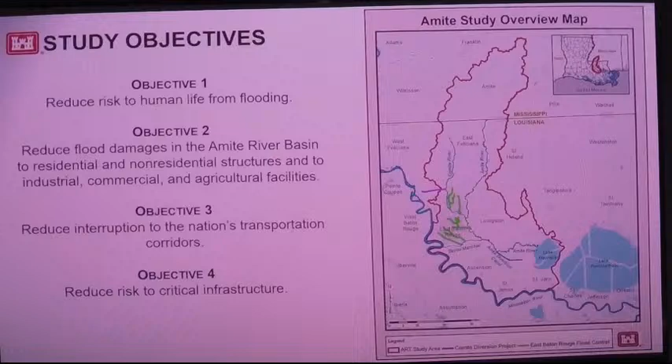The second objective is to reduce the flood damages to residential and non-residential structures, as well as businesses, industrial, commercial, and agricultural facilities. And then the third and fourth objectives aim to reduce interruption to critical infrastructure, which includes evacuation routes.

And it is important to note the coordination in our feasibility study because it is through early and continued coordination with the public stakeholders and other agencies that we develop alternatives and conduct that planning process. And so it is an essential key part of the feasibility phase. And so this coordination helps in determining the appropriate level of documentation and analysis needed in developing and refining the study purpose, goals, objectives, constraints, and the range of alternatives to consider. And agency coordination helps us determine the impacts to the resources, possible mitigation measures, opportunities for environmental enhancement, as well as in identifying the NEPA and permit requirements of other agencies.

And so since the start of this study, we have been engaged with our non-federal sponsor, the Louisiana Department of Transportation and Development. And then during the early phases of planning, we held several public information meetings as well as government stakeholder meetings with federally recognized tribes. Subsequently, 2 in-person public NEPA scoping meetings were conducted by the New Orleans District in December of 2019. And the purpose of these meetings was to present the stakeholders and the public with alternative plans that had been developed under the study and then obtain feedback to ensure that the study area's problems were being addressed by the alternatives being considered.

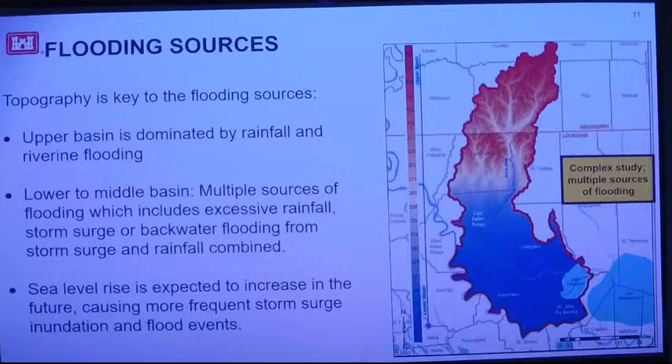Just to give a general overview of our study here, the study authority is from 1967, and it has been used several times to study flood risk management measures in the area. And there are 2 currently authorized Bipartisan Budget Act 2018 construction projects, the Comite River Diversion and the East Baton Rouge Flood Risk Reduction projects, that have resulted from this study authority. You can see those projects in purple and green on the map to the right. The non-federal sponsor for this study is the Louisiana Department of Transportation and Development, and we have partnered with them throughout this process and will continue to do so.

And so the Corps of Engineers refers to studies as being 3x3x3 compliant. What that means is that studies are to be completed in 3 years, $3 million, and with 3 levels of vertical team engagement and review from district, division, and headquarters. This is required by law in the Water Resources Reform Development Act of 2014.

And this process is centered around decision-focused planning rather than, say, task-oriented planning. So you're reorienting the planning process away from simply collecting data or completing specific tasks, and focusing it on doing the work required to reduce uncertainty to the point where the team can make an iterative sequence of planning decisions required to complete a study in full compliance with environmental laws and statutes.

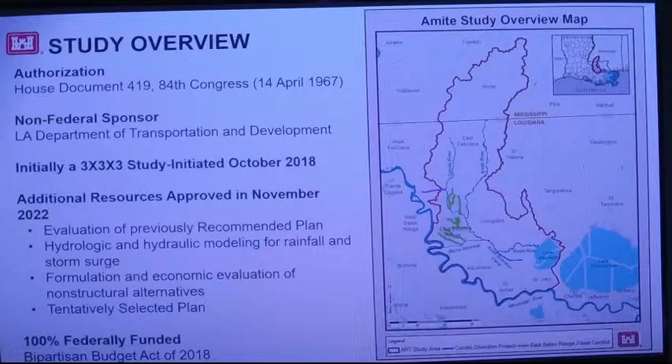And so the decision to approve the request for additional time and funding was approved by the Assistant Secretary of the Army for Civil Works in November of 2022. And the team conducted extensive hydrologic modeling and a non-structural evaluation, which led us to a tentatively selected plan. And so that request for additional time and funding included an effort in the amount of $1.91 million and another 20 months of non-structural evaluation.

And so on December 15th, that draft report was released, and we are currently in reviews as indicated in yellow on the slide. Additionally, the team is conducting what we call feasibility level design, and that includes refinements to the hydrologic modeling as well as the costs and the benefits, which I'll cover on a later slide, as well as refinements to the non-structural implementation plan.

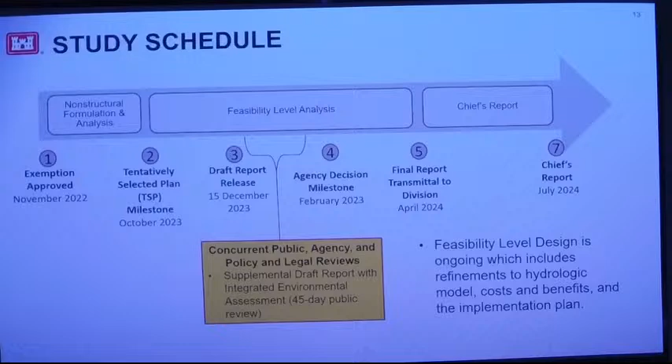And so since the beginning of this feasibility study, it was identified within this large study area that the topography played a key role in how we addressed the flood risk management. And so in the upper half of that basin, water flows to the south. But once you reach that middle terrace area, the topography is very flat, and that can limit the planning process. And this very flat area in the lower half of this basin includes areas where influences of river stages are impacted by backwater flooding and surge.

And so since the study authority limited the formulation of alternatives to flood risk management or rainfall and riverine flooding, the team focused very heavily on large-scale solutions. And once those were identified, the alternatives were then focused on identifying structural solutions based on economic damages. Non-structural alternatives were also developed concurrently with a focus on socially vulnerable communities.

And then before I move on here, both rainfall and storm surge were modeled in our evaluation. While it was limited to flood risk management, which is specific to impacts due to flooding from rainfall and riverine flooding, storm surge was considered as a residual risk for these structures.

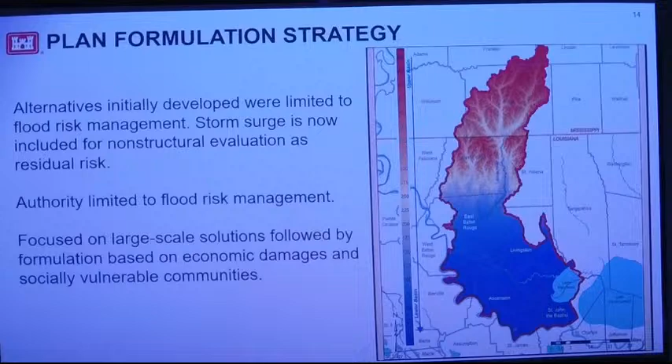Going back to 2019 again here, a draft report was released which identified a tentatively selected plan that included a large-scale dry dam, otherwise referred to as the Darlington Dam, as well as a non-structural component for residual risk. And essentially there'd be structures that would still see flood risk with the dam in place, and that would involve elevating those homes and floodproofing those businesses. And that would have been an earthen dam, approximately 80 feet high, located between East Feliciana and St. Helena parishes. And this plan had a total cost of $2.3 billion and a benefit cost ratio of 1.2. These are numbers from 2019.

And while this plan was preliminarily determined to be feasible, there were concerns raised during reviews as well as during evaluation, and we did regroup with our non-federal sponsor, and specifically the state of Louisiana, and revised our path forward to include further evaluation of a non-structural plan. The previously recommended plan has since been screened out due to several concerns, one of which has to do with implementability. There is a lack of soil data in the area of the dam, and that is required to inform the design. We would need that data in order to provide a sufficient design to ensure constructability. Additionally, due to the unknowns inclusive of the soils and the area, cost contingencies for that plan are certainly higher than they were in 2019.

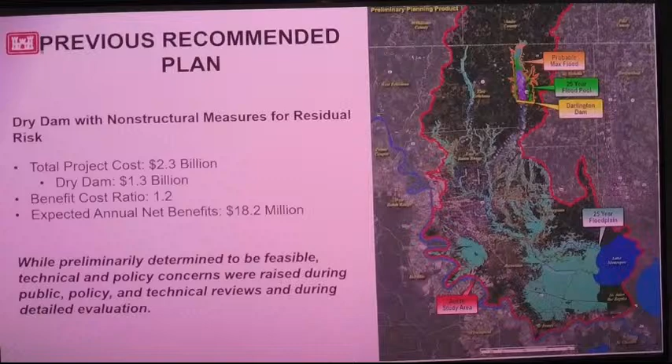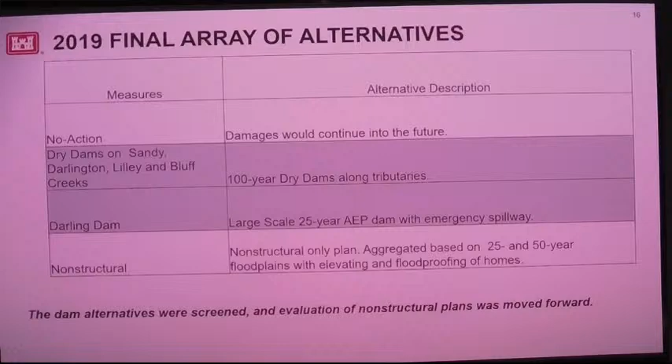There were several other plans considered in that final array of alternatives, including the Darlington Dam, and after that final array was reevaluated and based on the concerns and available information on the Darlington Dam, that alternative was deemed to not meet risk guidelines due to economic risk and cost effectiveness, as well as potential societal life risk and environmental acceptability. And so again, for those reasons, the Darlington Dam alternative, as well as the dry dams along tributaries that we've looked at, were removed from further consideration, consistent with policy of acceptability and implementability. And so once we screened those dams, the evaluation of a non-structural only plan was moved forward. And what do we mean when we say non-structural only plan?

Under a non-structural only plan, you would be talking about measures for potentially eligible structures that would see elevating residential structures up to the 100-year level of protection, and that would be no greater than 13 feet above the ground. You could see dry floodproofing of structures to ensure that the floodwaters can't get inside, making the walls, doors, windows, other openings impermeable to water, and that would be done up to 3 feet above grade.

Wet floodproofing is also a non-structural measure, and that would include structures up to 12 feet, wet floodproofing up to 12 feet to prevent damages. And then you can also see other risk mitigation measures under a non-structural plan, which would be typically conducted by local entities such as the state, and those can include floodplain management plans, building codes, zoning regulations, and flood warning

systems. And so there are many benefits to a non-structural alternative, and that includes minimal to no operations and maintenance, minimal to no environmental impacts, and long-term risk reduction by reducing recurring flood damages. And another aspect of non-structural plans could usually include acquisition or buyouts and relocating those structures. For this specific study, that measure was not cost effective and it did not move forward.

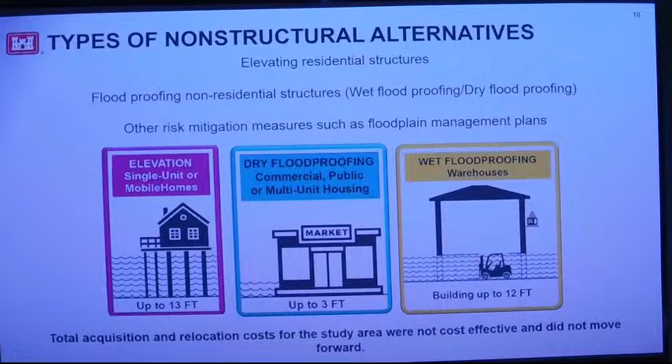And so thinking back to 2019 again, we looked at a non-structural only plan in our final array of alternatives. And that plan included eligibility for structures located within the 25-year floodplain throughout the entire study area. In continuing our non-structural evaluation, we optimized that plan by grouping structures together that shared similar flood characteristics, such as a shared flood source. And so there are 106 economic reaches in the study area, and there were 57 groupings or aggregates of structures identified according to shared flood characteristics.

And so aside from the number of structures identified within the 25-year floodplain, structures were identified as being located in the 10 and 50-year floodplain, and those were considered in the economic evaluation as well. And the first developed non-structural alternative was the National Economic Development Plan, and that is the plan that maximizes your net benefits or reduces the most damages from flooding.

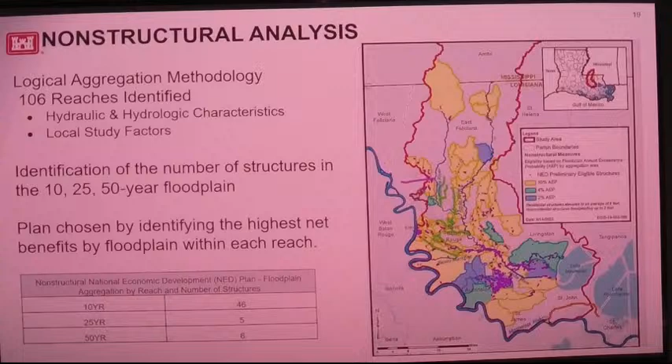And so an assessment of all structures located in the 10, 25, and 50-year floodplain was performed, and the net benefits of each separate grouping or aggregate of structures was analyzed based on the damages they would incur. And so when maximizing these benefits on the individual aggregate or grouping level, the National Economic Development Plan included 46 aggregates or groupings within the 10-year floodplain, 5 within the 25-year floodplain, and 6 within the 50-year floodplain. And so in total, over 3,100 structures would potentially be eligible to participate in the National Economic Development Non-Structural Plan.

And so after we developed the National Economic Development Plan, the team conducted a total benefits analysis. And 2 alternatives were developed to increase comprehensive benefits, and more specifically, flood risk management benefits to socially vulnerable communities. And the primary database that was used to represent social vulnerability data was the CDC's Social Vulnerability Index. And this database was utilized over other tools because the 4 themes that make up that index are designed to represent how well a community responds and recovers from a natural disaster like a major flooding event, making this database specifically applicable to a flood risk management study.

And so social vulnerability data included representation for socioeconomic status, age, disabilities, language, minority status, housing, and transportation. And areas that were in the 90th percentile or higher were flagged as having high social vulnerability. And embedded in that overall social vulnerability score are the 2 metrics necessary for environmental justice documentation under Executive Order 12898. And because of this reason, the team felt that this was an appropriate tool to address environmental justice and social vulnerability in a flood risk management setting.

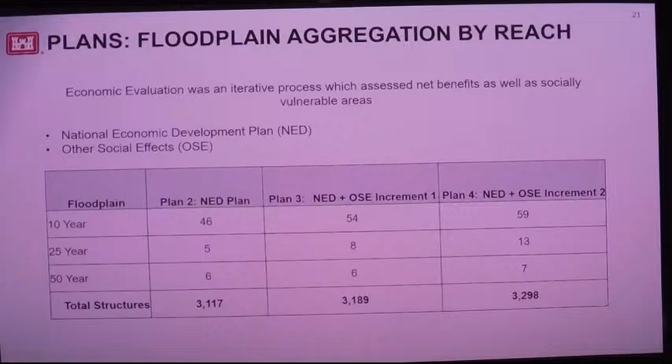And so what portion of the structures eligible to participate in the plan are located in environmental justice communities? And environmental justice, as it relates to the Justice40 initiative, according to Presidential Executive Order 14008, was evaluated by determining how many structures are included in the plans within areas of concern according to the Council on Environmental Quality's Climate and Economic Justice Screening Tool.

And so Plan 2 included 1,262 structures, or 40% of total structures, in areas of environmental justice concern. Plan 3 included an additional 22 structures in areas of environmental justice concern for a total of 1,284 structures, or 40% of the total eligible structures in the plan. And then lastly, Plan 4 included an additional 40 structures in areas of environmental justice concern for a total of 1,324 structures, or 40% of the total eligible structures in the plan.

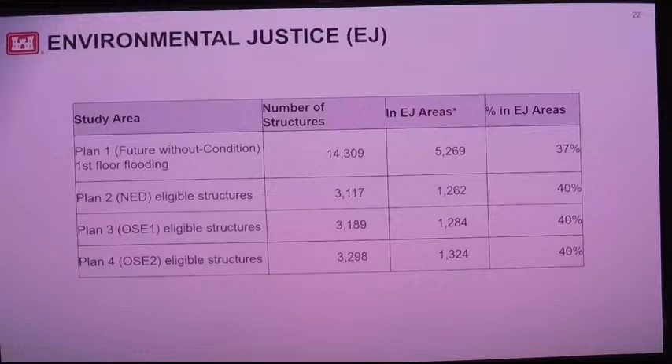The tentatively selected plan presently is Plan 4, the non-structural plan with the additive for other social effects for positive and negative benefits, because it provides flood risk reduction in terms of national economic development, along with the added benefit of flood risk management to vulnerable and disadvantaged communities, maximizing the benefits to those socially vulnerable areas. And so while this plan is not the NED plan, it provides the best level of comprehensive flood risk reduction to the study area and is the total benefits plan for this study.

And so this plan has a preliminary cost range between $1.5 billion to $1.6 billion, with a benefit to cost ratio within a range of 1.06 to 0.997. These costs and benefits will continue to be refined in the feasibility process. A policy exception must also be granted to recommend the total benefits plan. And if that exception is not granted, our tentatively selected plan will resort back to Plan 2, our non-structural national economic development plan.

And so in summary, the net benefits of each aggregate or grouping of structures which employed the aggregation method as described previously were analyzed based on the damages that would incur. Using this method, 57 floodplain aggregates, or groupings of structures, were identified. And the net benefits of each aggregate were analyzed based on the damages they would incur at the 10, 25, and 50-year events. The event that had the highest return of net benefits per aggregation was chosen.

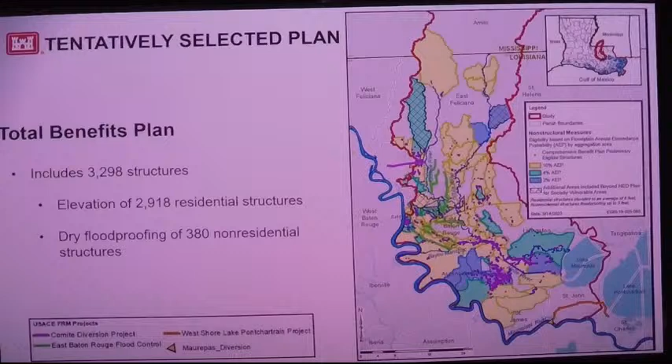And so what's next? We will continue to receive public comment as well as comments from our technical experts across the Corps of Engineers and policy and legal compliance comments from our division and our headquarters. The team will address these comments as necessary, and we would be headed towards an agency decision milestone at the end of February. This milestone, if successful, would mark the agency's endorsement of the plan and the approval to move forward with finalizing the report.

Again, if successful at that milestone, the team would be finalizing the report and going through more agency technical reviews, another round of legal reviews, prior to submitting the report to our division in April for final policy and legal compliance reviews, as well as state and agency reviews, and a final public review. So there are several rounds of review remaining. A chief's report would then mark the completion of the study in July.

In July, that chief's report would be signed by the Chief of Engineers for the Corps of Engineers. It is important to note that that is not the last stop before construction. This plan would require at least 2 congressional actions to move forward to that phase. Authorization for construction would be required, as well as appropriations. So we would need funding to proceed with pre-construction engineering and design and the construction phase itself. At the very earliest, 2026 would be when construction could start, assuming that authorization and appropriations are in place at that point.

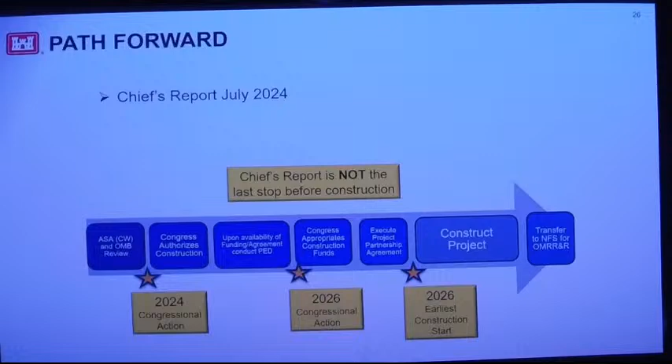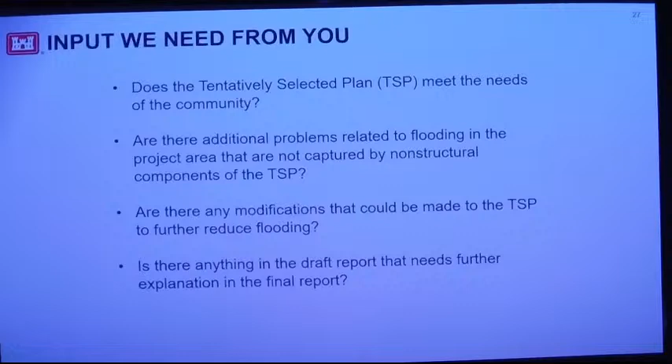And so with that, that does conclude the presentation regarding the Amite River and Tributaries Feasibility Study Tentatively Selected Plan.